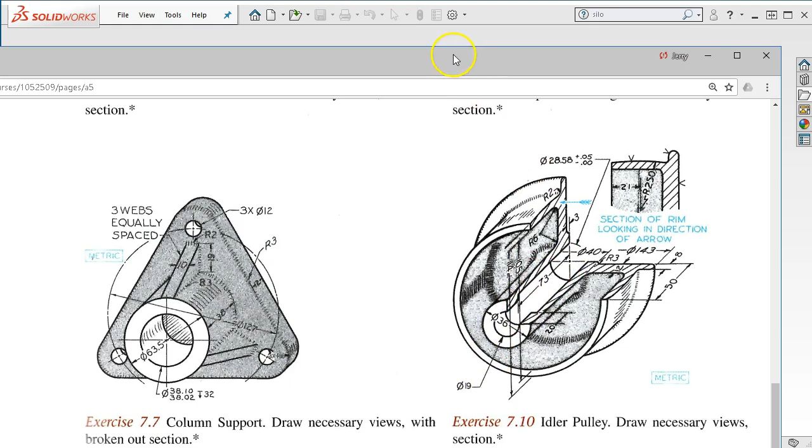12 millimeters, and I still don't see anything radius or diameter wise. So if the 40 comes up to the base, that's kind of an assumption. But it wouldn't put it too far out of line. So, all right, 143 on the diameter, 50 overall, and 73 to the step, 19. So, you know, anywhere you need to identify chain dimensions, 73 plus 19, that kind of becomes a little more important to make sure that it doesn't get missed.

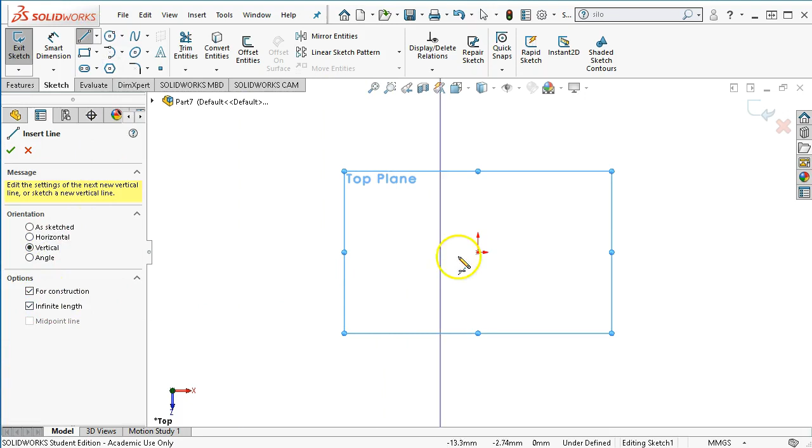All right, so our new metric part. I go to the top plane again. We're in a revolve, so it gets a center line, vertical, infinite length, and goes to the point. I go back into the select, make sure everything took, and we'll do the first step, a little relief, the back over, and an angle.

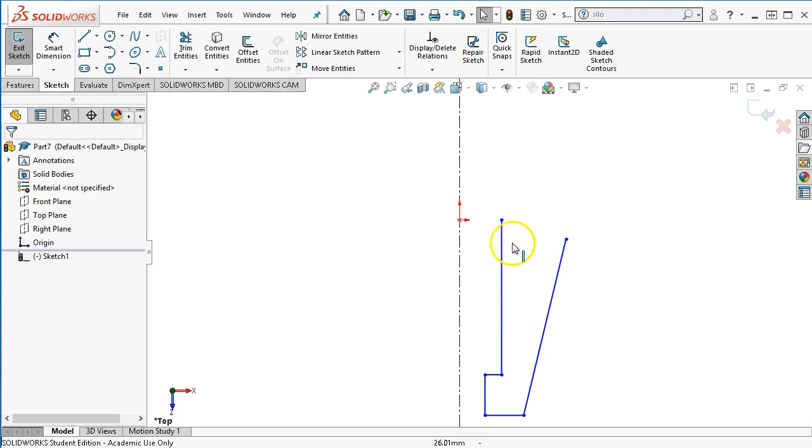Okay, so yeah, that would go to the bottom. So let's go ahead and put that one in too. And if I'm going to make that a radius, if I want to go ahead and include the arc instead of making a separate radius, I'll do the continuous arc.

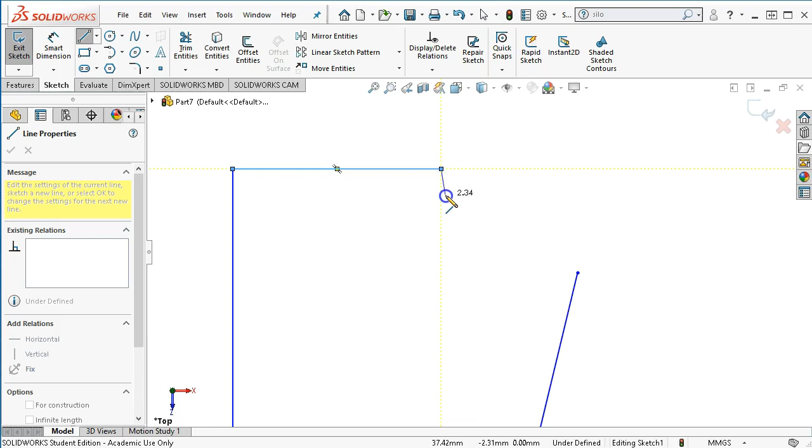If we were going to make it a radius, I would just come out 3 millimeters and then continue back over to the right. But if I go to the starting point, get my continuous, that's not the direction that I want, but that is.

All right, so just kind of going back to that start point, repicking it, letting it find that geometry.

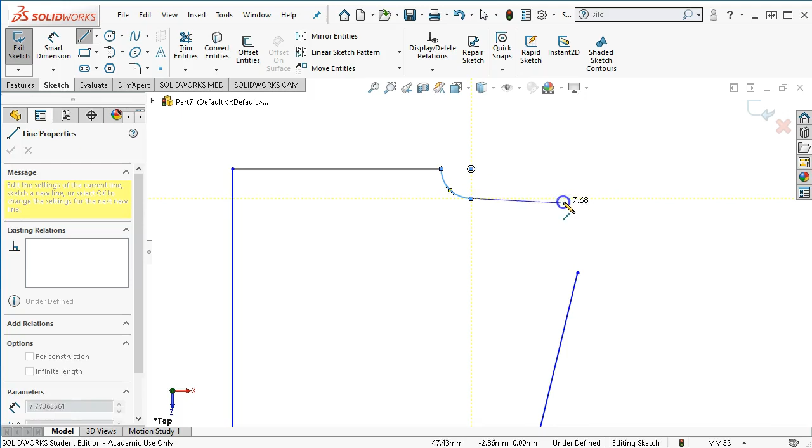All right, so let's just work with this much. And so the first is 40, and then we have the 28.58, and so that would be the smaller number since we have a plus tolerance to work with. So we're going to go bilateral.

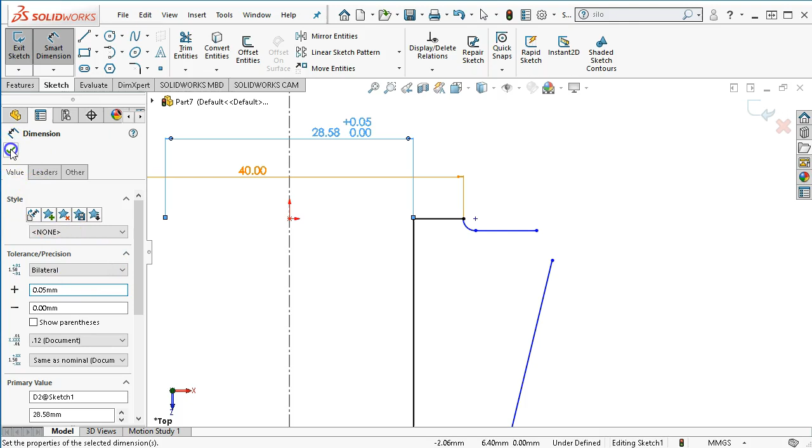And 0.00, or not 0.005, we're in metric, 0.05, and let it include the tolerance. All right, so we'll mark for drawing.

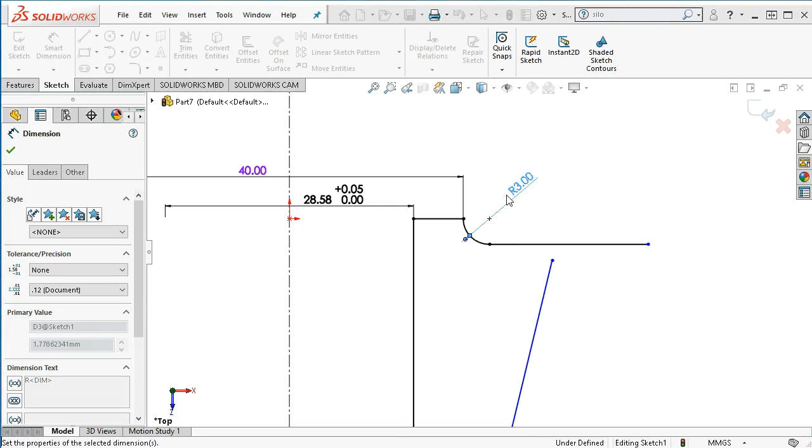And then this is going to come on over. So smart dimension, radius of 3, and then that, because we have that 90-degree arc, center is at the vertical and horizontal of the 2 points. Then the height will be 3.

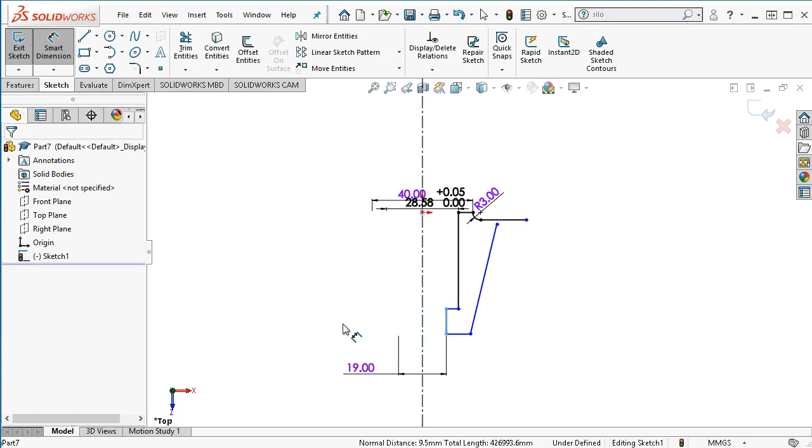Let's bring it back over for the 19. Oh, maybe, yeah, 19 diameter, 20 on the step. Was trying to reverse those two numbers, and then 73 from the step to the end. So that puts us out at 93 overall.

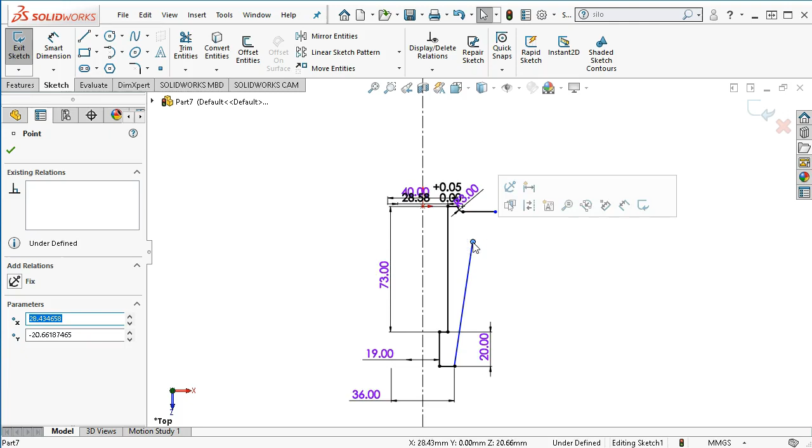All right, so 36 millimeters at the top diameter. And we'll go ahead and bring that one down a little ways. Oh, we said we're going to stay with the 40.

Since I haven't seen another dimension somewhere, so we'll pick the 2 endpoints, and those can be vertical. And there's enough there. Just making sure it's not intersecting into the geometry. Up and over and back.

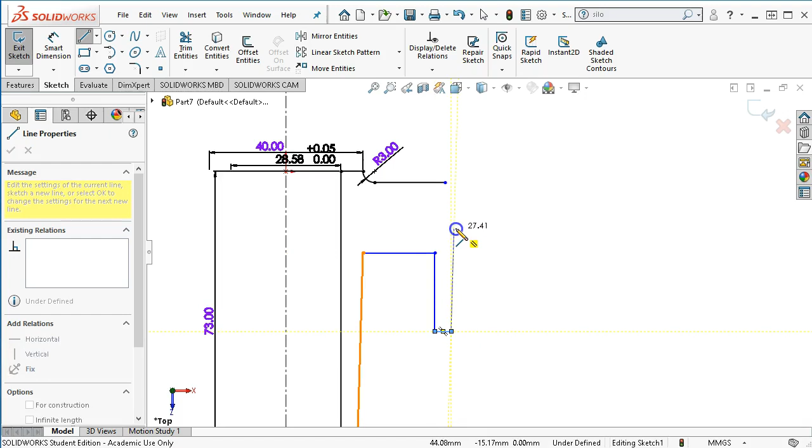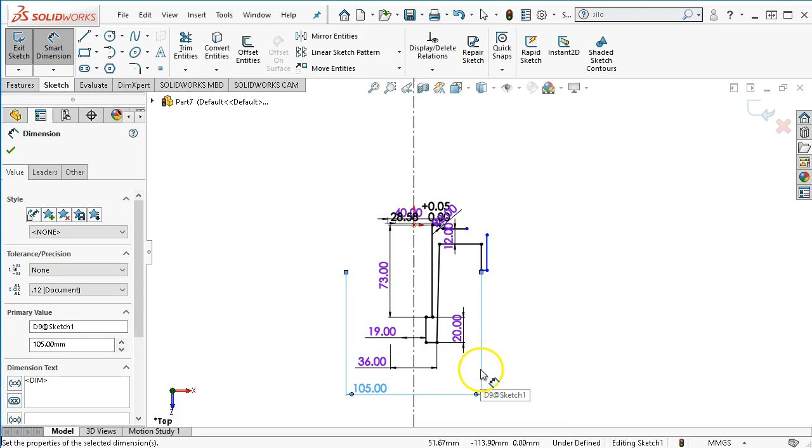Alright, and the second inference line was trying to be parallel to the line we just created. Alright, so the web goes to 12 millimeter. The inside dimension is 105. And the outside dimension goes to 114.

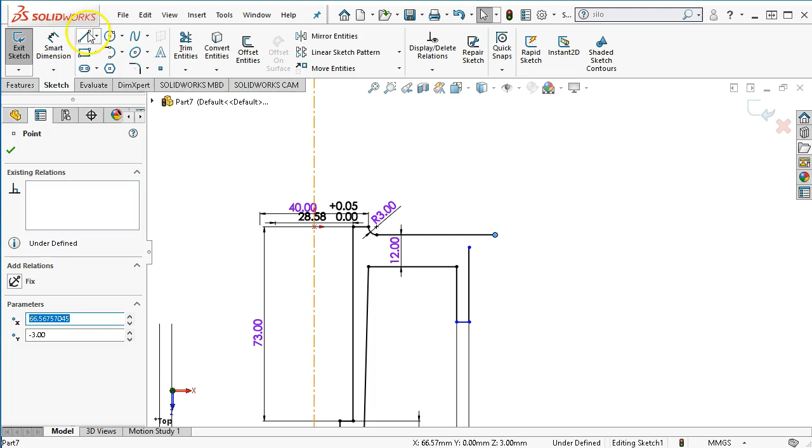All right, and then the overall, no, I guess that's not really an overall height. Let's go ahead and finish out drawing the geometry. So this needs to come over, and then we'll connect the last two.

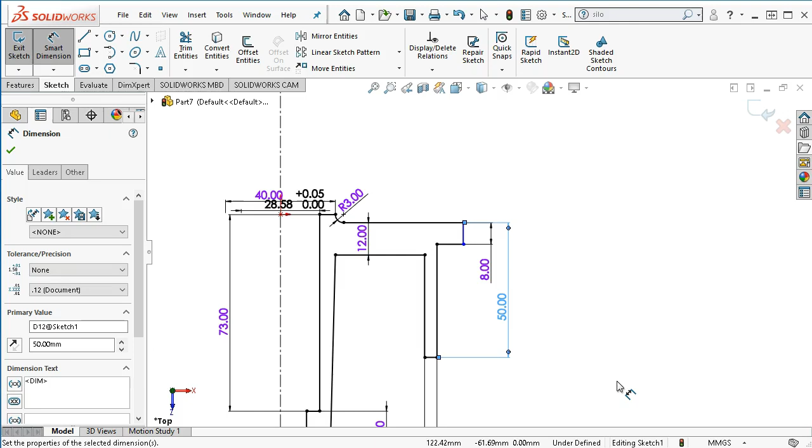Alright, so from what I can tell on the drawing, we have 8 millimeters for the step, and then from the bottom we have 50 millimeters. And the very far outside then is the 143.

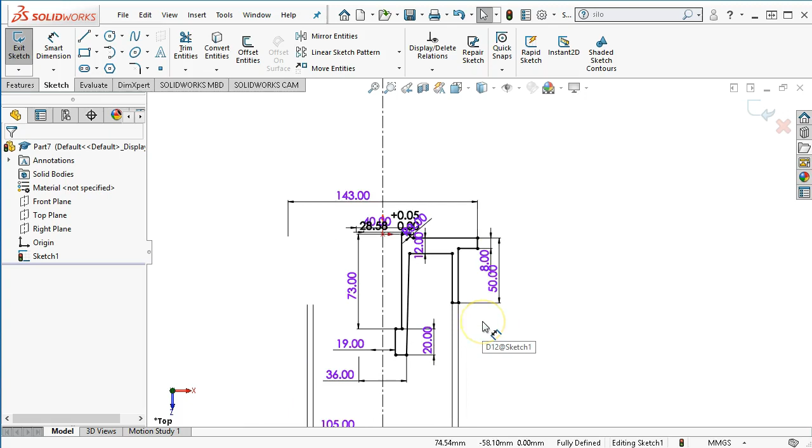Okay, so that geometry is looking good. Just a quick check, make sure I didn't miss anything. Features, Revolve base.

And we'll go ahead and accept. Alright, so I did not include the crown. So we're given a radius of 250 millimeters from the point, the 21, to the center.

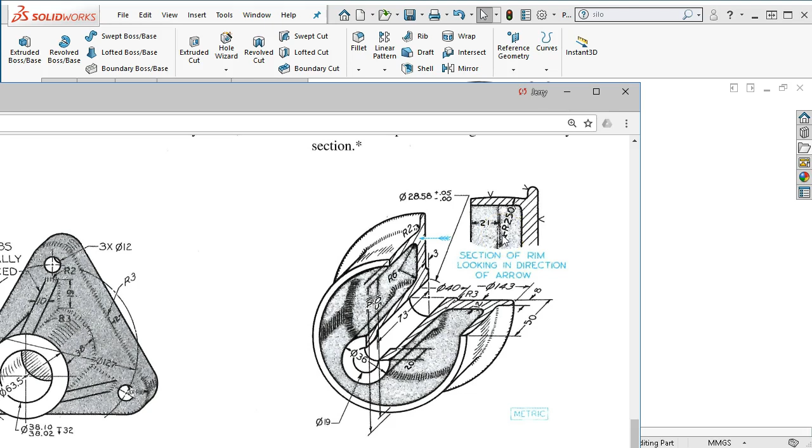So what does that actually measure out at would be the question. I need a number from here to here, and that comes up 38. Just thinking if it was 42, that would be center, that'd be nice and convenient. But we're dealing with 50 minus 12, 38.

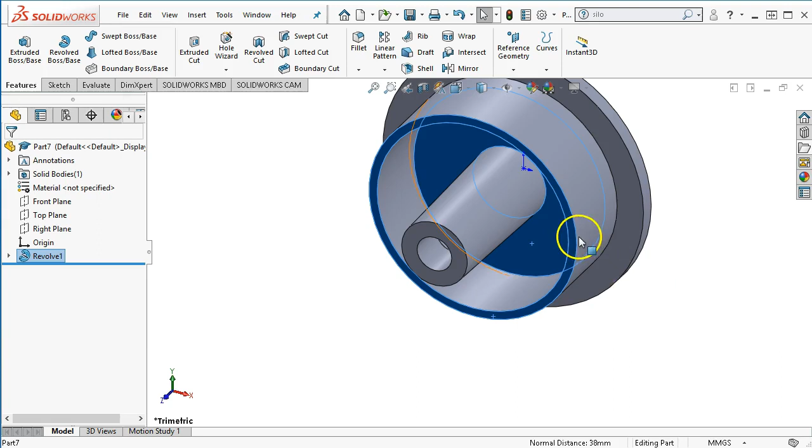Alright, so we've got to shift that arc just a little bit. So that's an interesting geometry. It doesn't go past the 143. So we're going to be making, or not, it doesn't go past the 114.

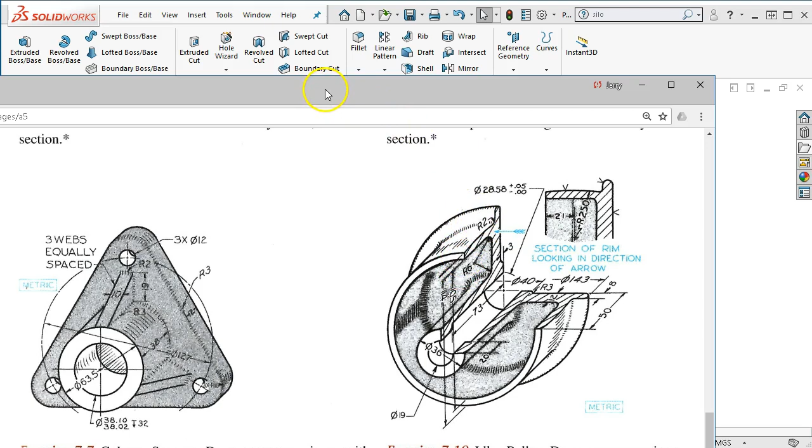Well, that brings up a good point. Is the 114 to the edge? Or is it to the peak of the crown? From that it looks like it's to the edge, so we'll actually be building out a little ways. Alright, so that would be one we'd want to mark for clarification, but for our purposes that will get it.

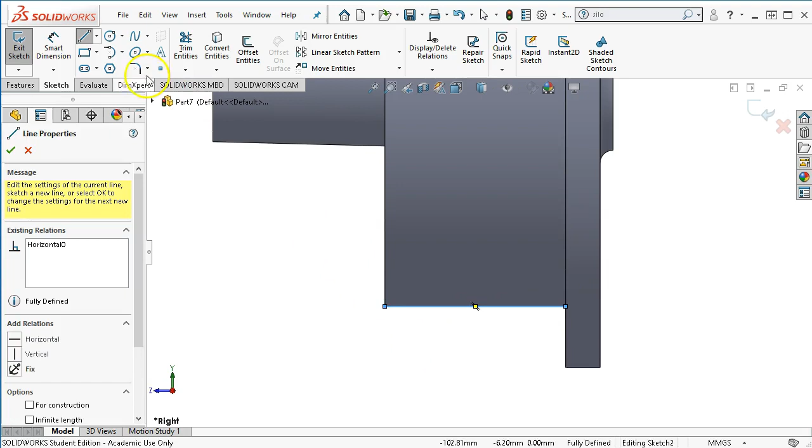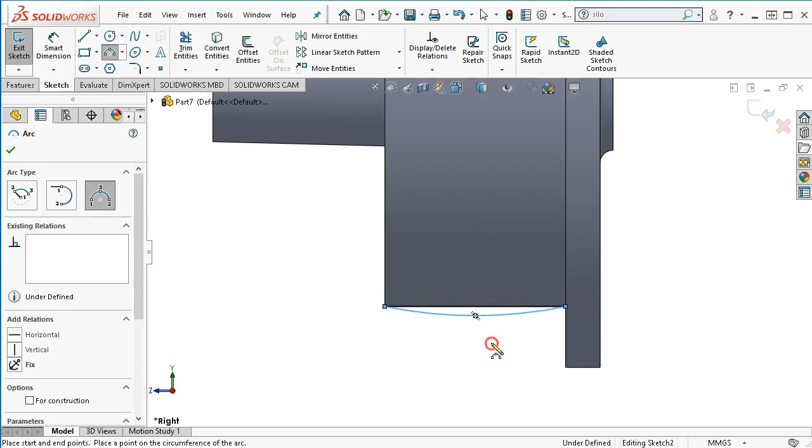So on the right plane, or the top plane, but we haven't used the right plane very much, so I'm going to find those points. We've been using mostly tangent arc, occasionally a center point. We're going to use a 3-point arc this time, which says pick the start, pick the end, and then you still have a dashed line, so you're going to drag it until it looks like it's where it's supposed to be.

Alright, so there's the center point. And that was 21 from this top edge, and that's kind of scary that it went right there, with no decimal places. And then we need a radius of... didn't like that one, so...

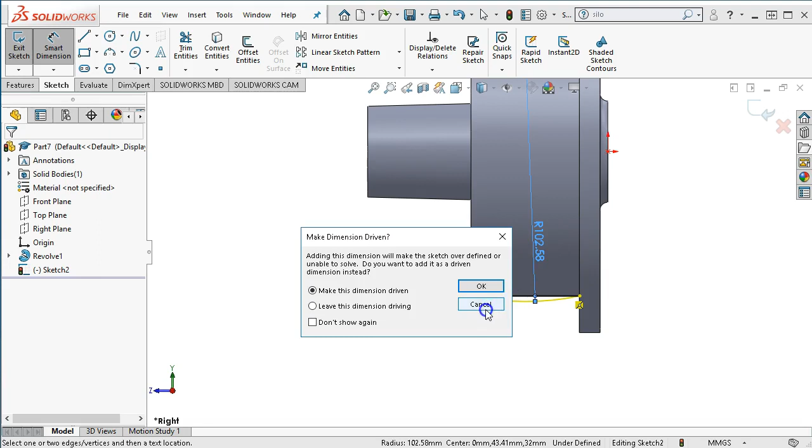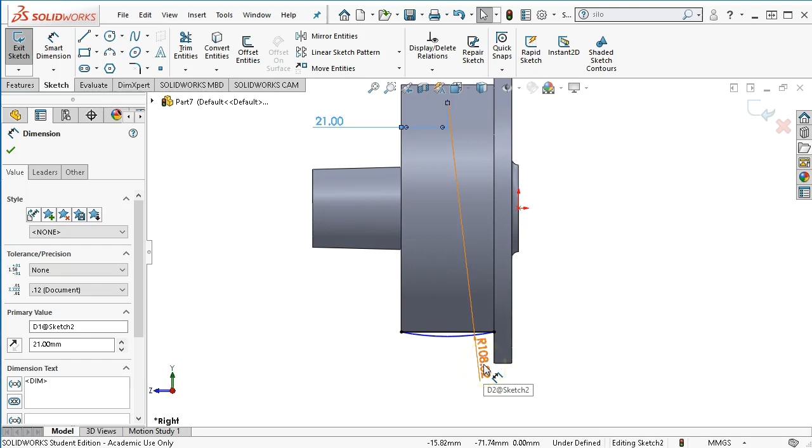Alright, so let's leave that driven for now. Yeah, it's still able to move, so that's interesting. It needs to be connected at the points. So we're able to make it smaller. So I'm going to switch the 21 to driven, and then we'll come back over to the radius and uncheck the driven.

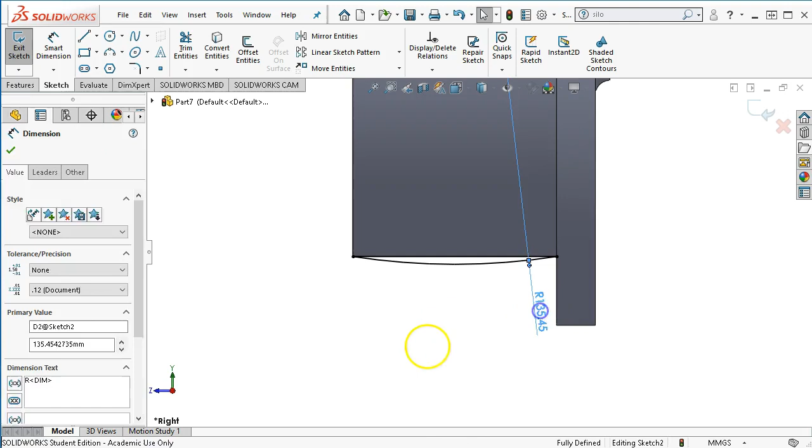So 250. So that narrows it down. Alright, and the arc's still at 21, so it figured that out. Alright, so I'm good with that geometry.

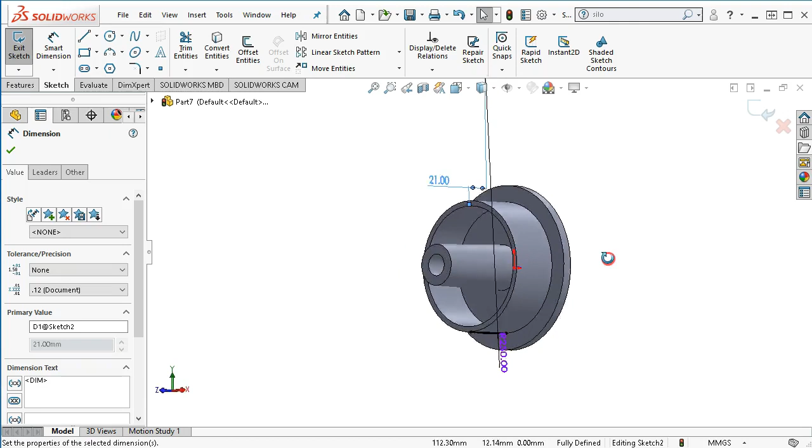And I can turn on the temporary axes. It should, when we go into the feature, revolve... nope, we're not cutting out the material. We're revolving the boss base. The axis of revolution, well, should be able to pick the inside. No, it's looking for an axis.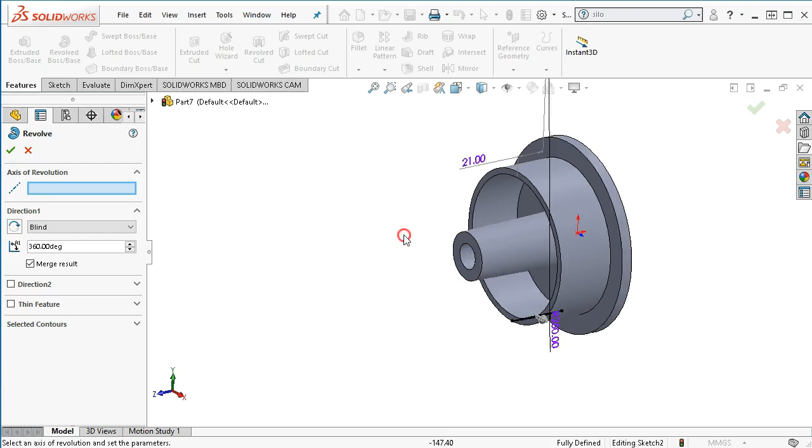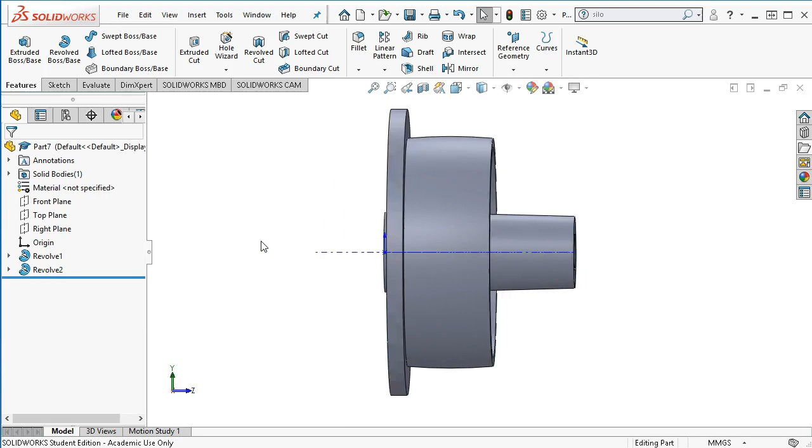Then we'll have to go to temporary, pick the temporary axis. There it goes. 360 degrees, let it build out. So there's just a slight arc, and we'll see it bulge just a little bit.

Alright, so I could have included that in the first sketch, but the first sketch was getting complicated enough adding on that little piece of geometry. And we may go back in on a redesign and decide that it doesn't need the crown. It's easy enough to suppress the arc out and modify the geometry that way.

Alright, so we'll go into isometric view. We have a radius of 2 on the outside corners and 6 on the inside.

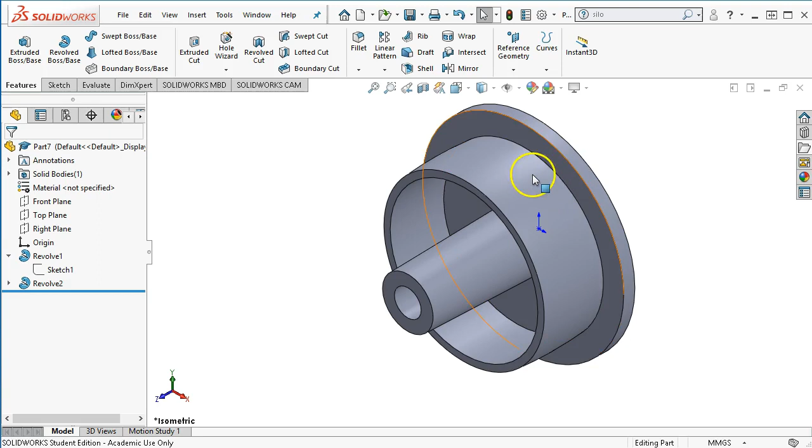So that being the case, here's an instance where I can select the face, go into the fillet, and it's going to be 2 millimeters, and we'll accept. And so both edges, the 2 edges associated with the face, get the fillet.

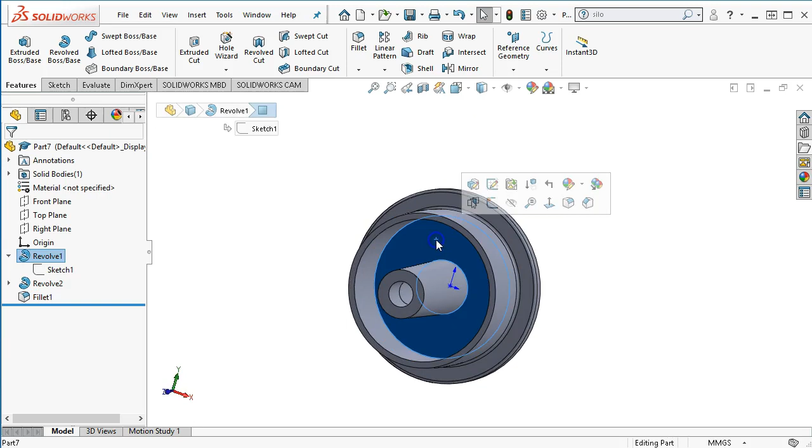And then on the inside, that goes to 6 millimeters. And same thing, we'll have 6 millimeters on the interior ring and 6 millimeters on the exterior. Alright, so the geometry isn't complicated, it just has to be analyzed and deciphered and made to work.